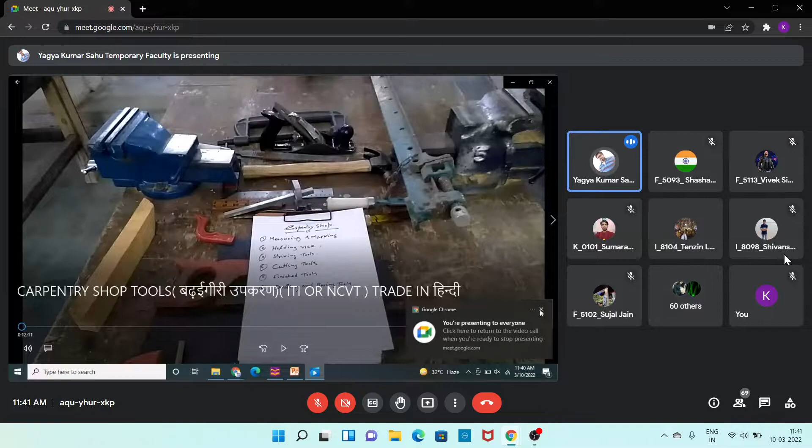So let us see today carpentry shop. I'm showing you a video in which we will see the different types of tools used in carpentry shop. Just see, I'll explain one by one. Is it visible to all of you, the video? Yes sir.

Okay, so you can see a number of instruments are there. So there are different categories. First is measuring and marking tools. Second, holding devices, for proper holding of object and workpiece. Then there will be striking tools, cutting tools, finishing tools, drilling and boring tools, according to our requirement.

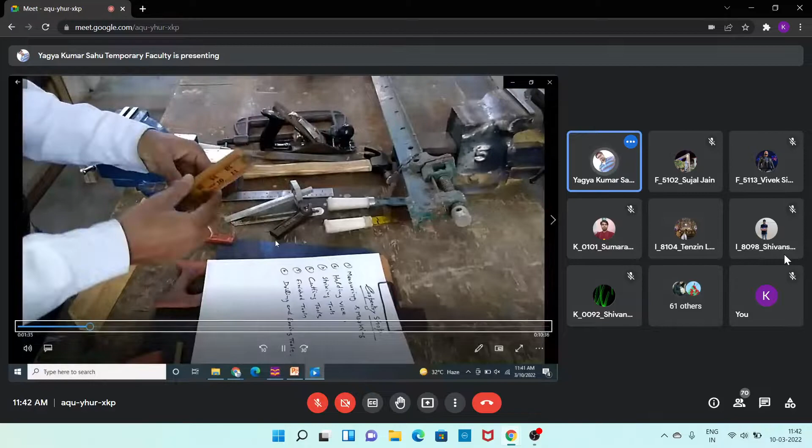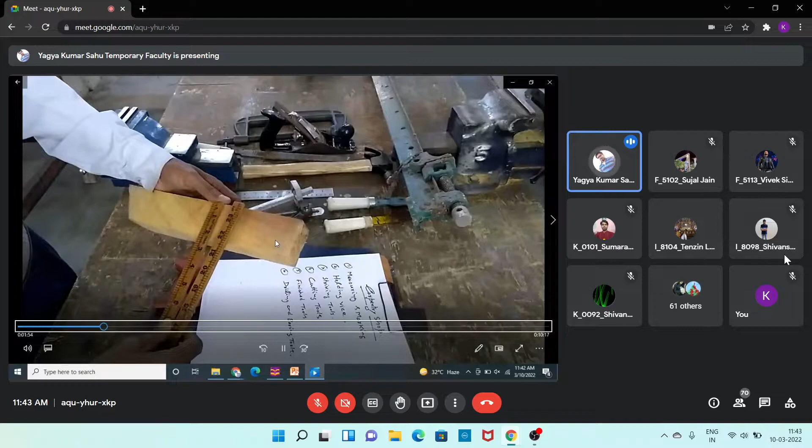So let's start with measuring and marking tools. First of all, you all know a simple steel rule of 30 centimeters that is used for measurement as well as for marking length according to requirement, of 30 centimeters, you can say 12 inches. Then this is called a four-fold marking tool. If the length of the object is bigger, then you can use this four-fold marking tool for marking as well as for measurement.

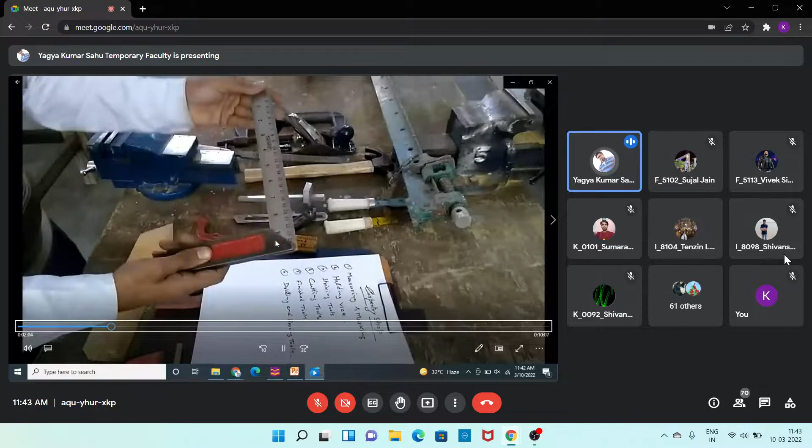Then this one is a very important tool. What is the name of this tool? Anyone? It is called a tri-square.

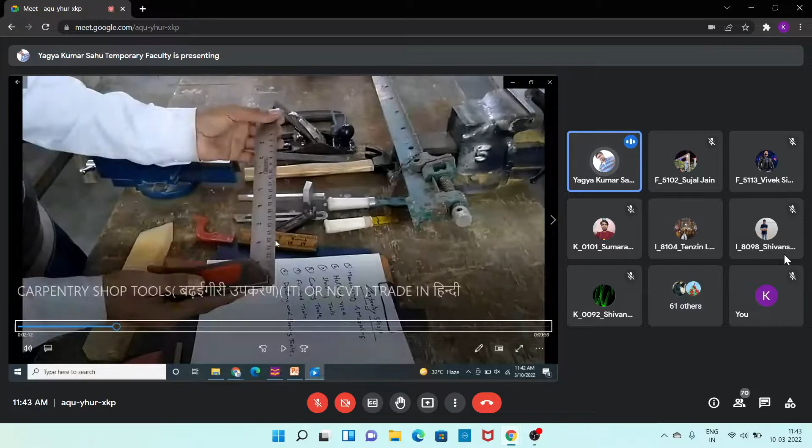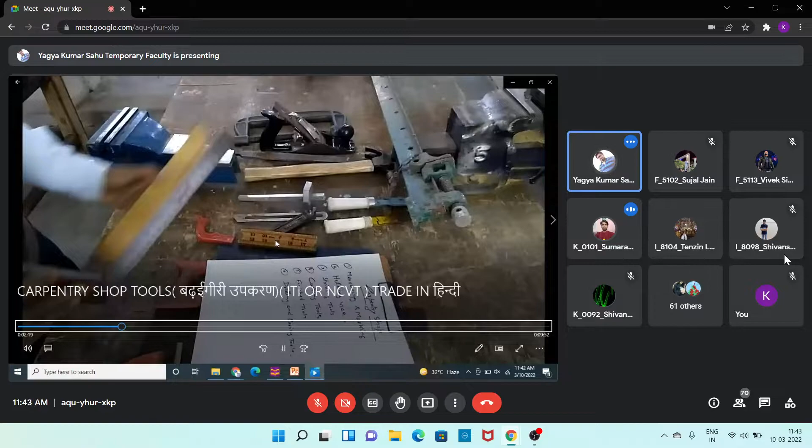You can see there is a steel rule which has divisions, and there is a base for holding. It is used for checking flatness of the object, flatness of the workpiece, as well as the perpendicular 90 degree angle between the edges. Is it clear to all of you? Yes sir. This tri-square is used for checking flatness of the object, or you can say workpiece. Sir, in this one, is the angle fixed as 90 degrees or can we change it? No, that one is fixed. It is used for checking flatness as well as 90 degrees between the edges.

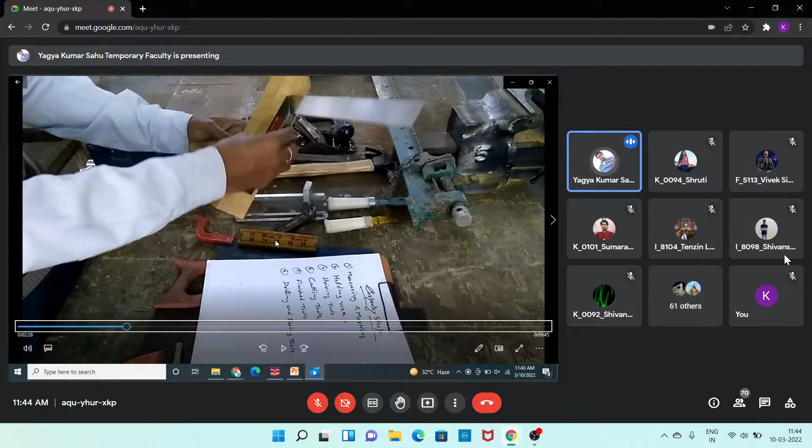That angle is fixed, you cannot change it. We'll use another instrument for making angular lines and angular measurements. That is called a bevel protractor.

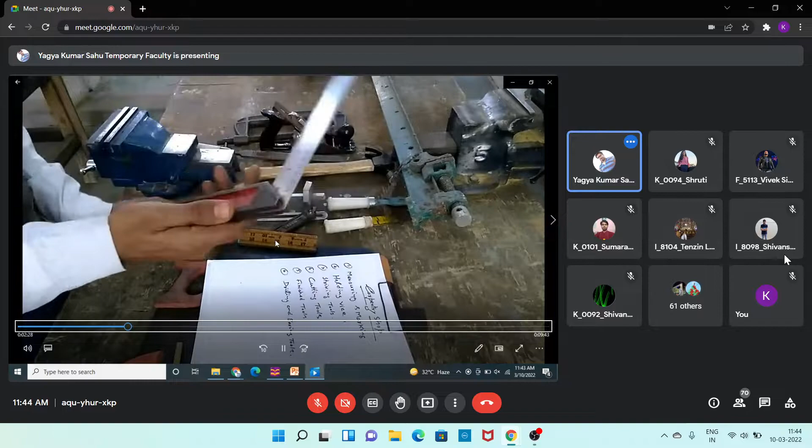This one is used for checking flatness. You can also mark length with the help of the graduations on this steel rule.

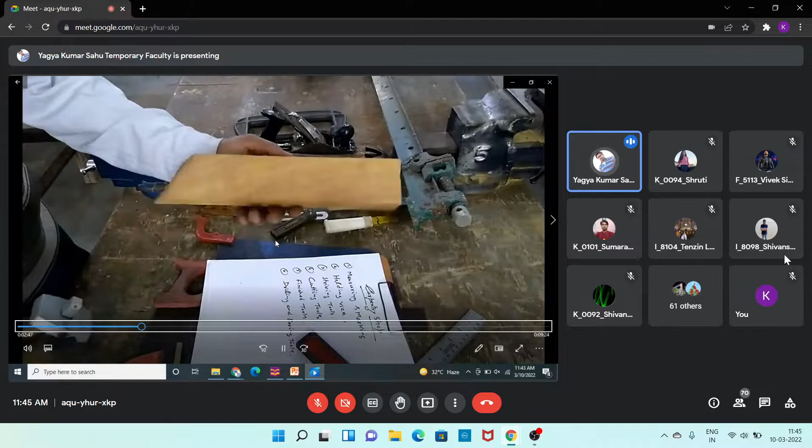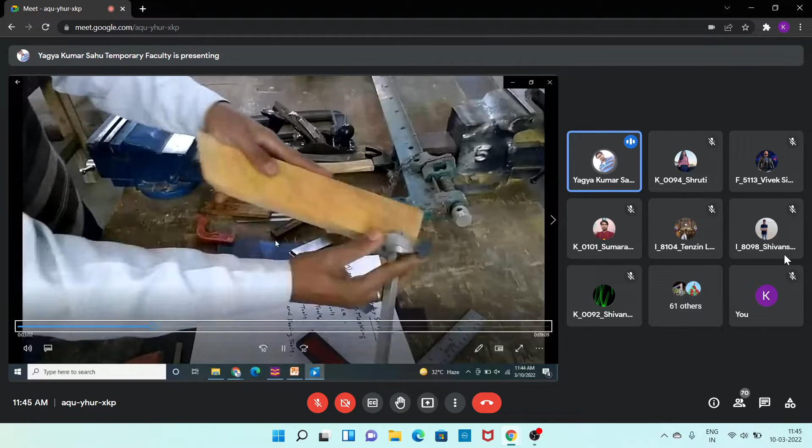Now, especially for marking, we use a marking gauge. This one is a marking gauge. Suppose if you want to cut this wooden piece and want to make a marking for that cutting purpose, you can make marking with the help of this marking gauge. You can see how it works.

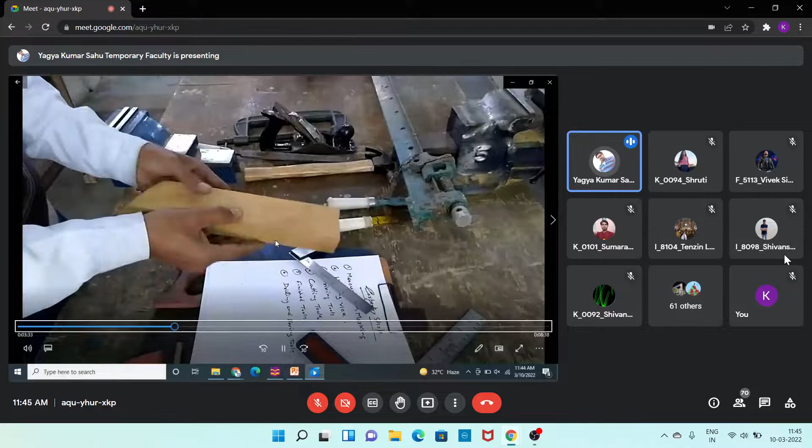You can easily make parallel lines also with the help of this marking tool. It has an arm and an adjusting screw, or leading screw, which is adjustable. With the help of that screw, you can change the length of the marking, and also make parallel marking.

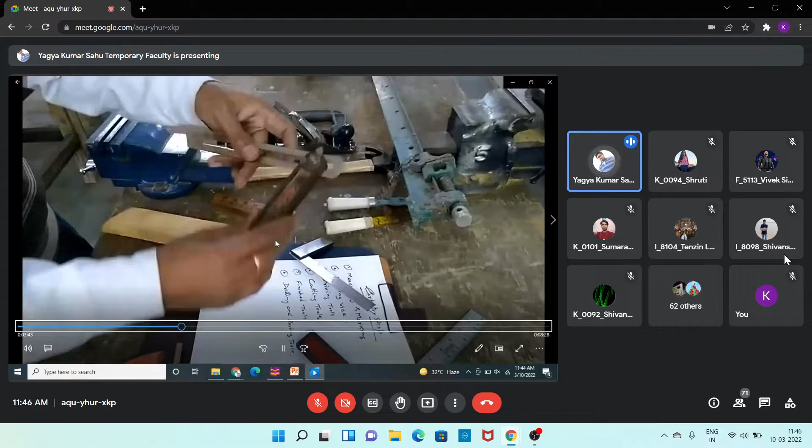Now this is called a bevel protractor, used for marking at different angles. If you want to mark a line at an angle of 30 degrees, you can adjust the one arm as per your requirement. So this one is your bevel protractor, for marking at different angles. Easy?

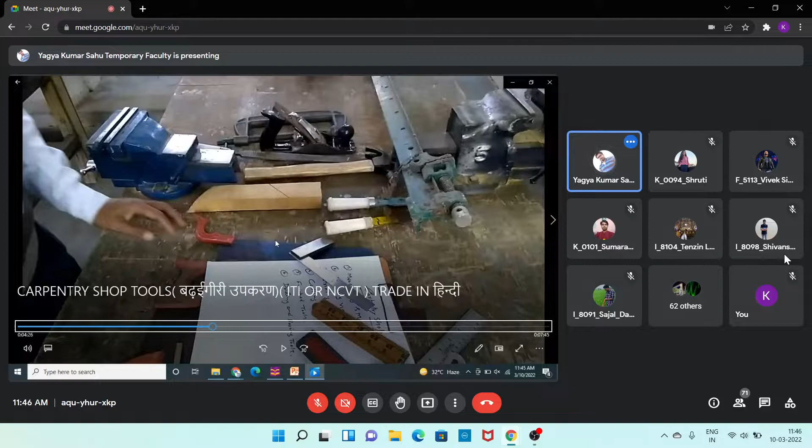Yes, sir. So these all are marking and measuring tools: steel rule, four-fold tape, tri-square, marking gauge, and bevel protractor.

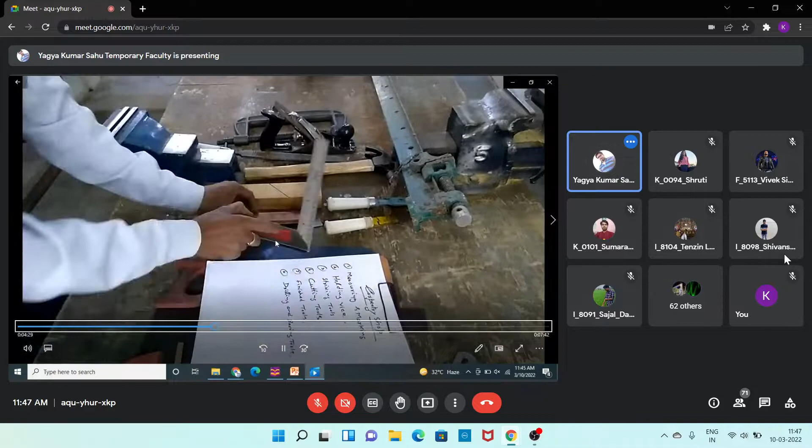Now, for operating any workpiece, we need to hold it. So for holding any workpiece, a bench vise is used. It has two jaws and a lead screw; one jaw is fixed and one is adjustable. You can fix your workpiece this way. By operating the lead screw, the workpiece is fixed, and you can perform any operation on it.

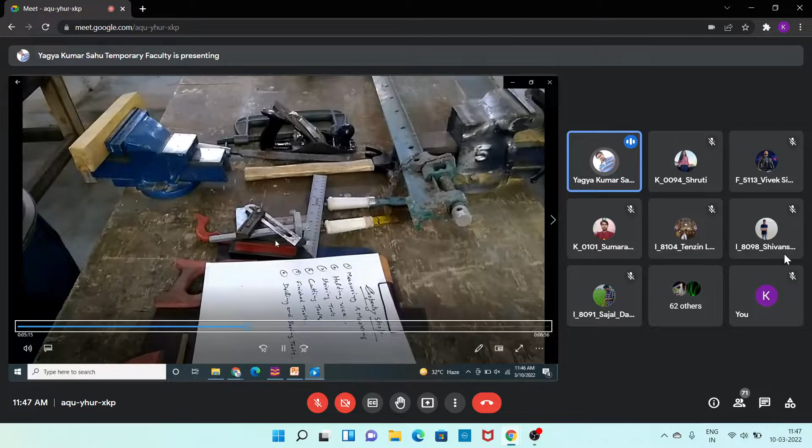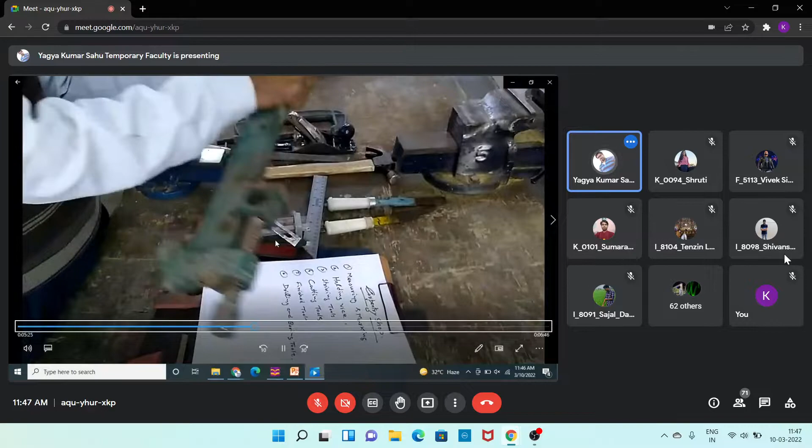This bench vise is used for a smaller workpiece. If the size of the workpiece is small, you can use this bench vise. Suppose the size of your workpiece is bigger, then you can use this T clamp. In this also, you can adjust one screw and increase the length of your holding device.

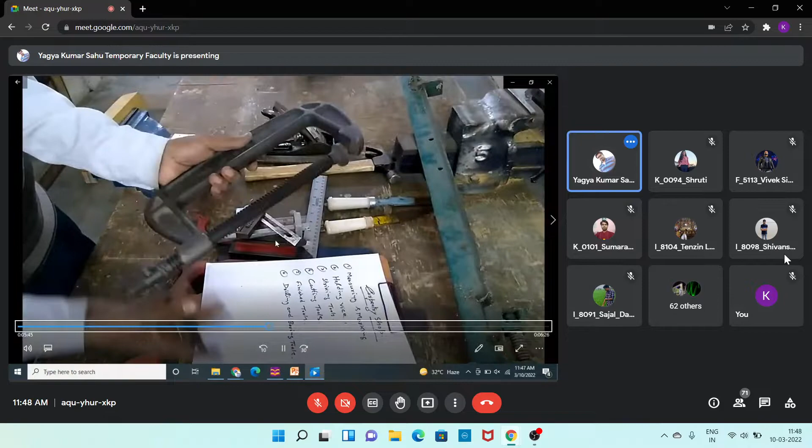Similarly, for a medium size workpiece, there is a C clamp also. There is a lead screw in this C clamp too, to adjust the length of this instrument for holding different sizes of objects. So these three are used for holding purposes: the first is bench vise, second is T clamp, and the third one is C clamp. Is it clear to all of you? Yes, sir.

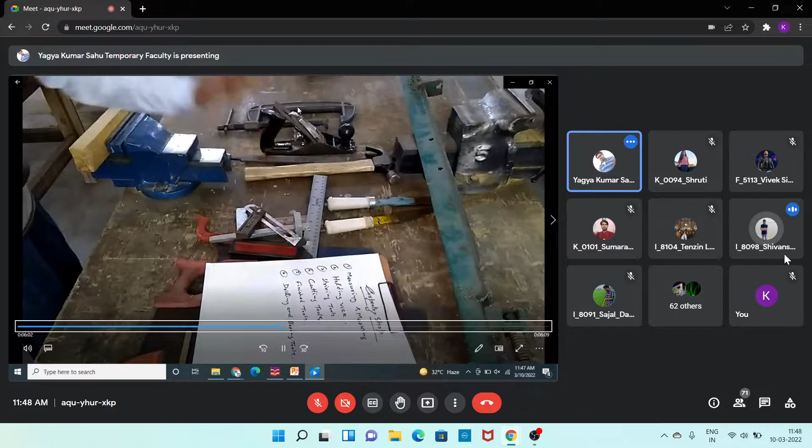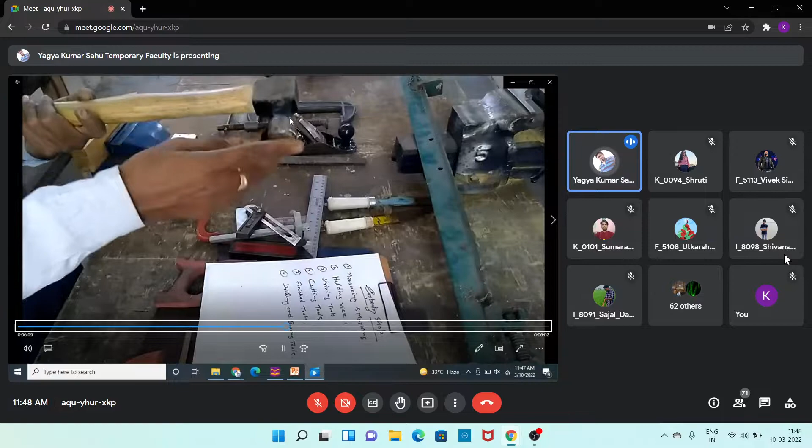Now this one is a striking tool. What is it? Tell me the name of this instrument. Hammer. Okay, this is a claw hammer. It is also used for removing nails and pins, and for striking purposes, like striking chisels and different drilling tools. Basically, we use the claw hammer in a carpentry shop.

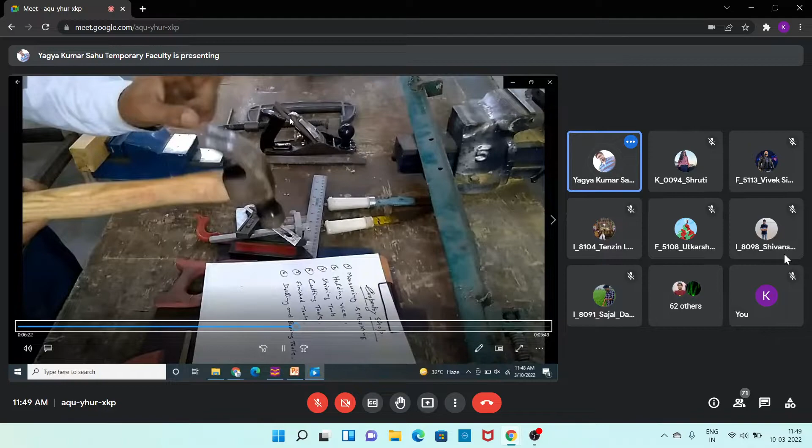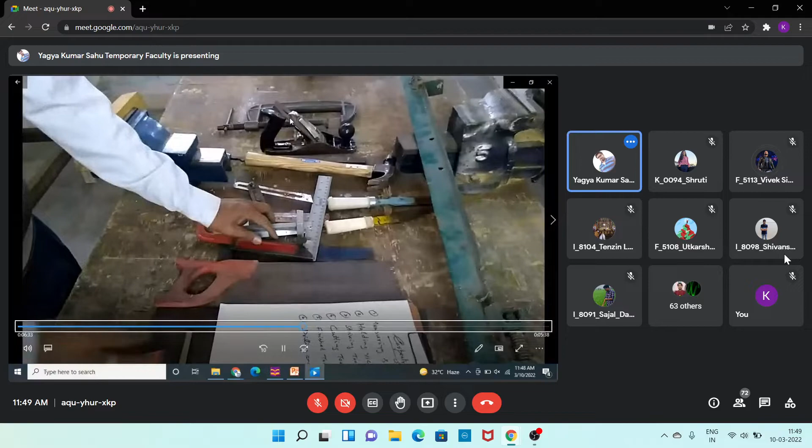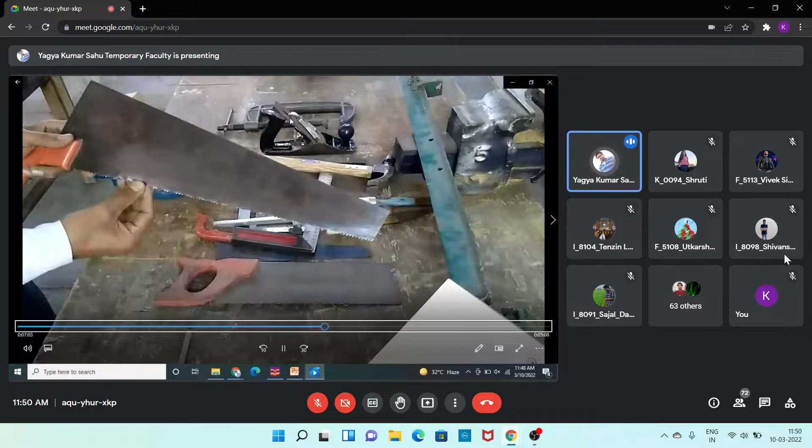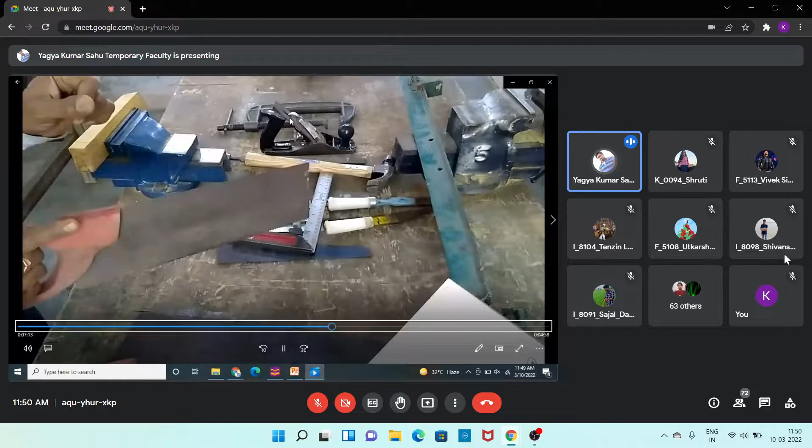Now next is your cutting tools. What is used for cutting in a carpentry shop? Saw. We have different types of saws: rip saw, cross cut saw. This one is the rip saw; it cuts backward, when you pull it along the grains. You can see how to operate this rip saw—it cuts in the backward stroke. Now, if you want to cut forward, you have to use a cross cut saw. This one is a dovetail saw, used for perpendicular cutting or smaller length cutting.

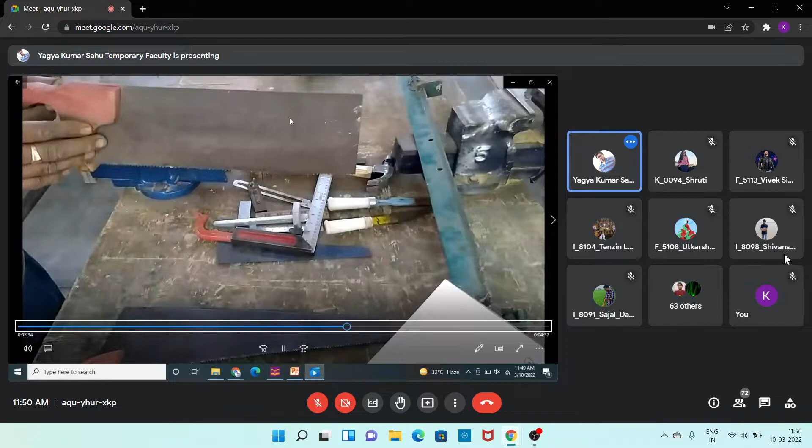And there is a compass saw also, for cutting keyholes, grooves, and angles. Then, after cutting, we use finishing tools. This one is your compass saw.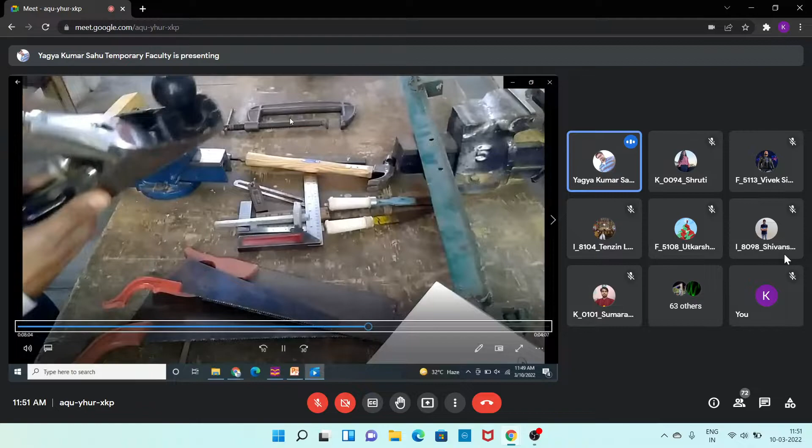Now, what is the name of this instrument? This is a finishing tool. It is called a jack planer or metal planer. There are different types of planers: jack planer, metal planer, smooth planer. What is the function of this instrument? To make the surface of the wood flat and smooth, for finishing purposes.

Now, with the help of this tri-square, you can check the flatness of the surface as well as the perpendicularity between the edges.

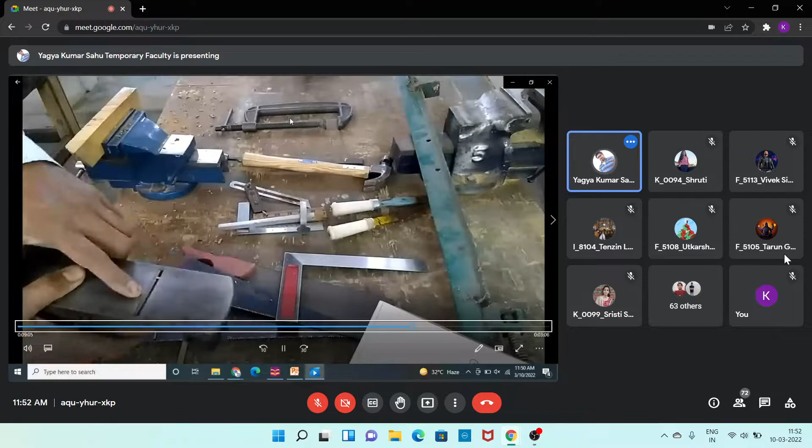Now, after this, it has a blade at 45-degree angle. It is made of carbon steel.

Now, suppose you want to cut this piece of wood from this particular workpiece to get the desired shape. You need to use chisels for cutting.

There are different types of chisels. Mortise chisel, firmer chisel. This one is mortise chisel, which is used for maximum material removal.

And for finishing, we use this one, which is called firmer chisel. So the first one is mortise chisel and the second one is firmer chisel. One is used for maximum material removal and the second one is used for finishing purpose.

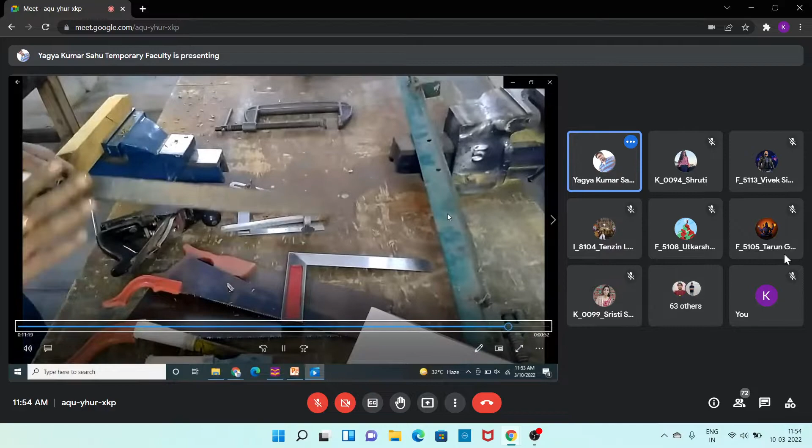This is a file. It is also used for finishing the surface as well as removing material from the surface of the workpiece. This is a rasp file.

So all these instruments are used, and there are drilling tools also, for making holes. Different types of drilling tools are there also. Let us see an operation.

For making a T-joint, now I am playing a video in which you can see how to create a T-joint in a carpentry shop, using the different tools.

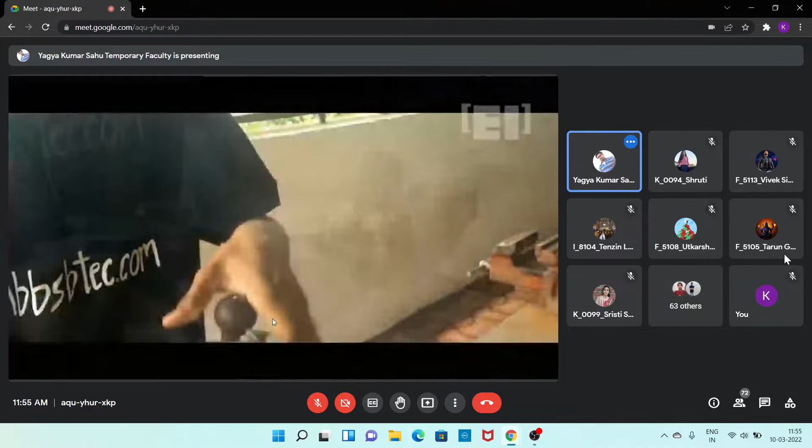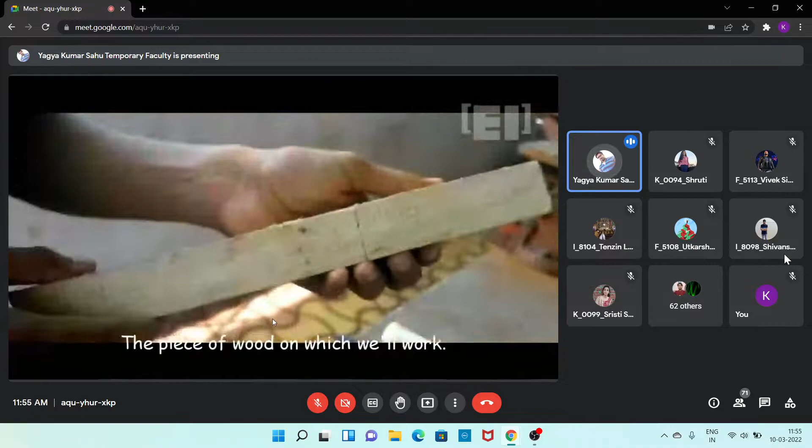So this is a metal jack planer. This is a hand saw used for cutting. Flat file. And this is the workpiece, a piece of wood from which we will create a T-joint.

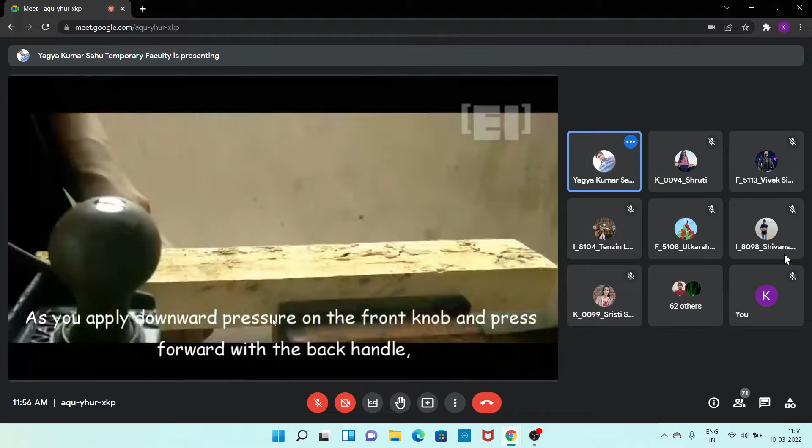So first of all, cut this wood. Make the surface plane using this metal jack plane, and with the help of a tri-square, check the flatness also. So he is removing material to get the perfect flat shape.

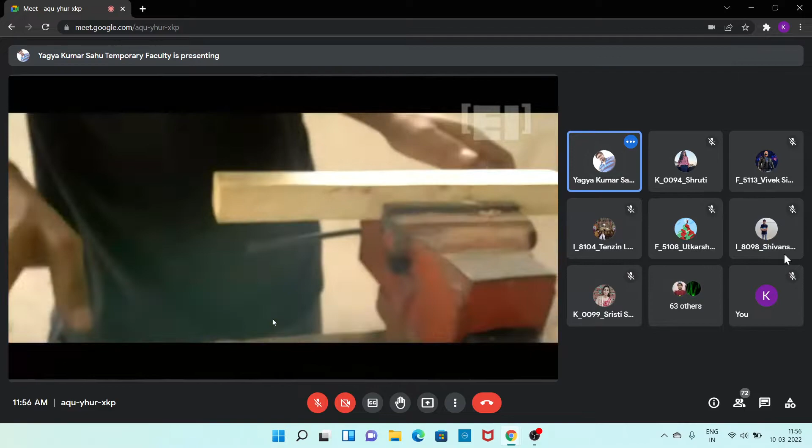Now using flat file for finishing purpose, removing some extra material.

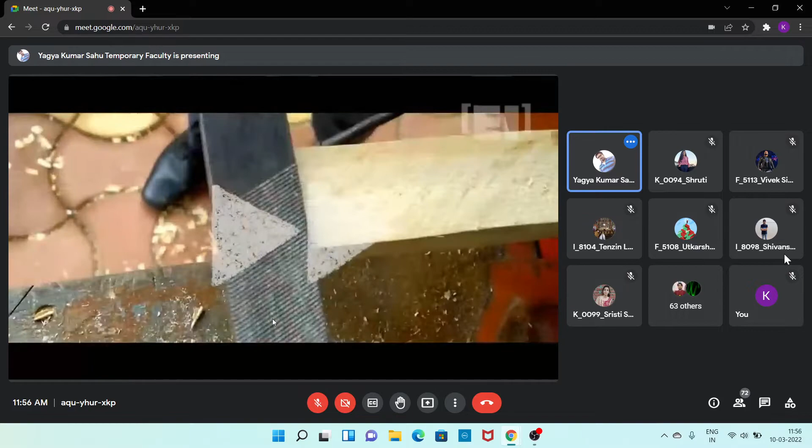Now he is marking the length for creating T-joints. So he will cut this object into equal halves. For that, he is marking the length.

Now he'll use a rip saw for cutting.

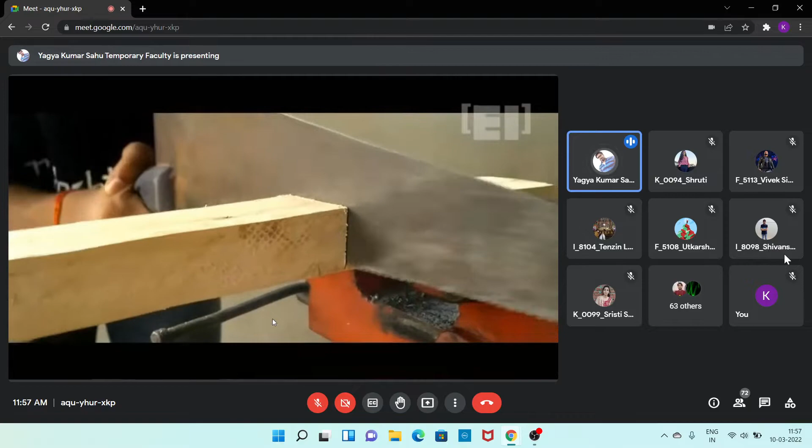Is it visible to all of you? Yes, sir. Yes, sir.

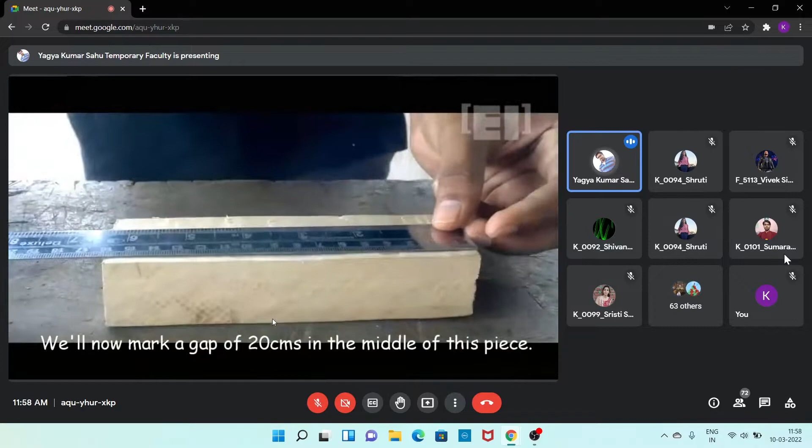Now again using the flat file for removing the material. Now we will do all the markings for one piece of the T-joint. So he is using a steel rule for marking.

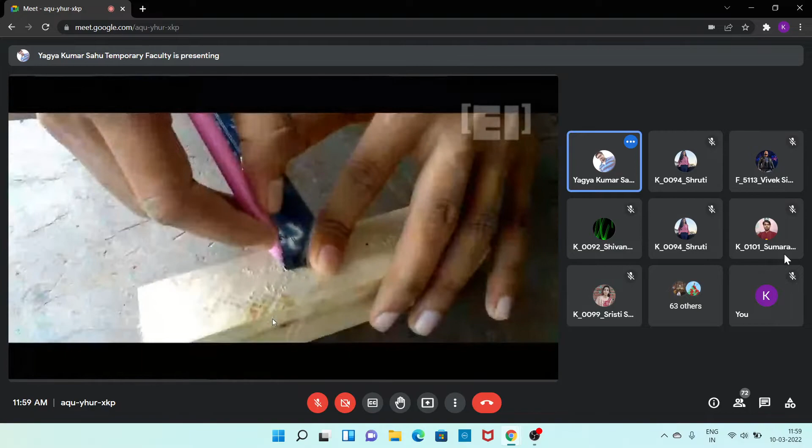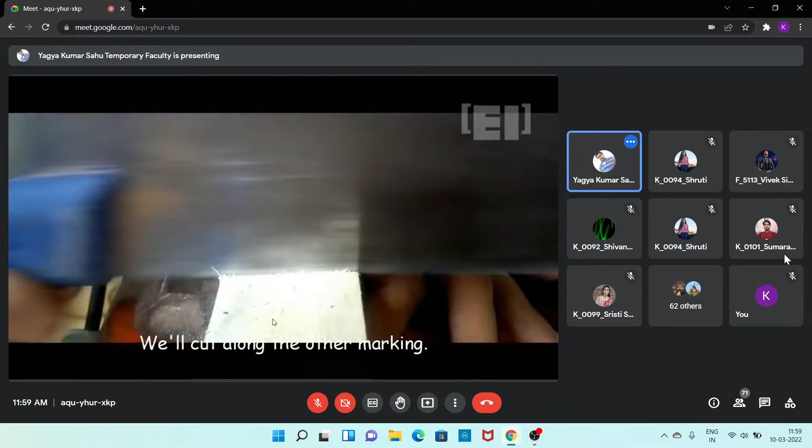So he will remove this much material. First of all, use rip saw for cutting both the sides.

Now, can he use rip saw for cutting along that one side also? No, sir, he cannot use those.

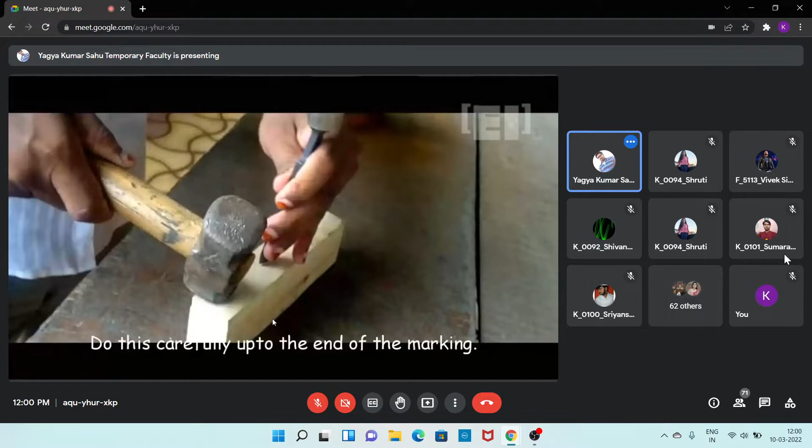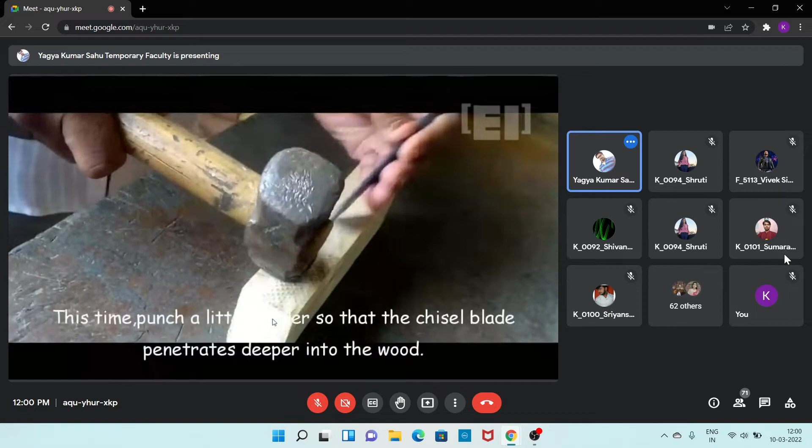So he is using now a chisel, for removing this piece of wood. So first of all, getting the hollow shape for the joint.

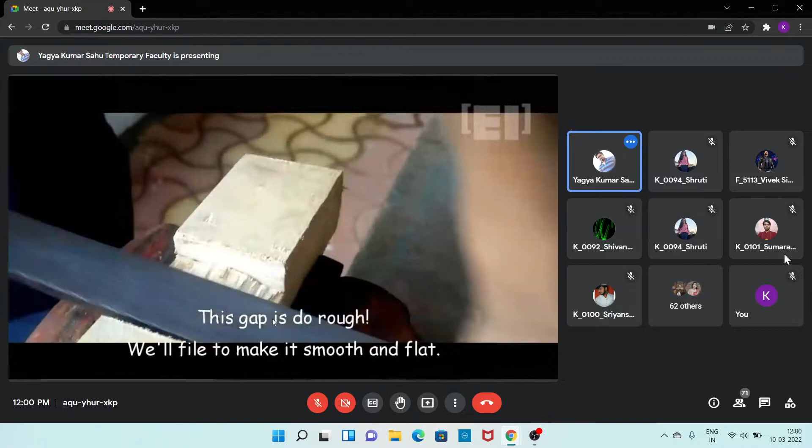Now use flat file for making a perfectly smooth surface. It will take time.

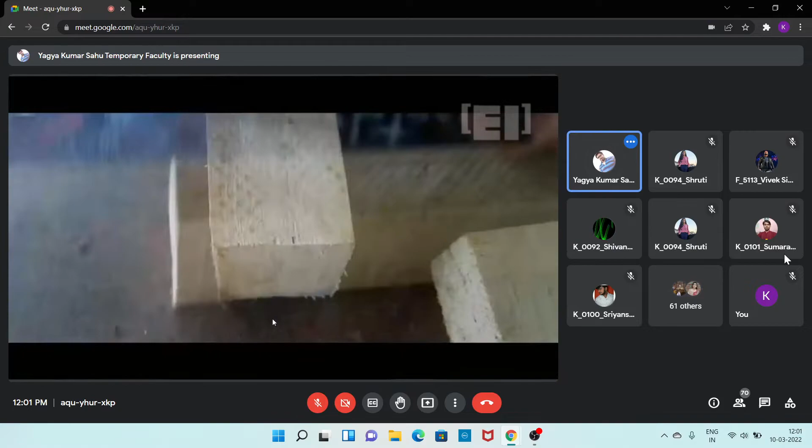So I think the first portion of the T-joint is completed now. Now the second part. So he's marking length for the second part also.

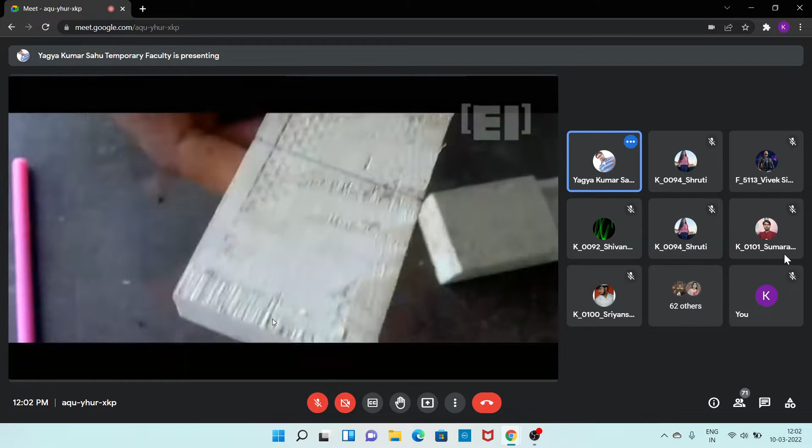Now you can use rip saw for cutting this piece of wood.